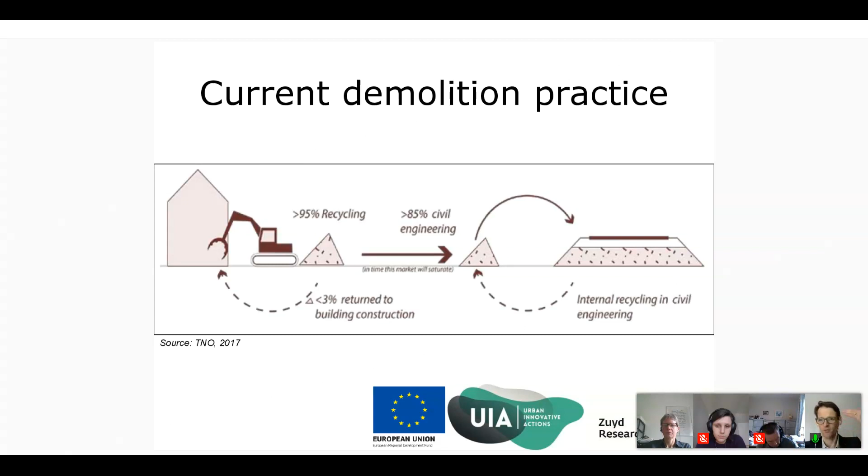A lot of this material is actually concrete, and as you probably all know, concrete's environmental impact related to the whole construction industry is very significant, about 40 to 60%. At this moment, the rate of circularity in the construction industry in the Netherlands is very low, it's 3%, and a lot of the 95% that is recycled is actually downcycling. We're not using the materials at the high level that is possible.

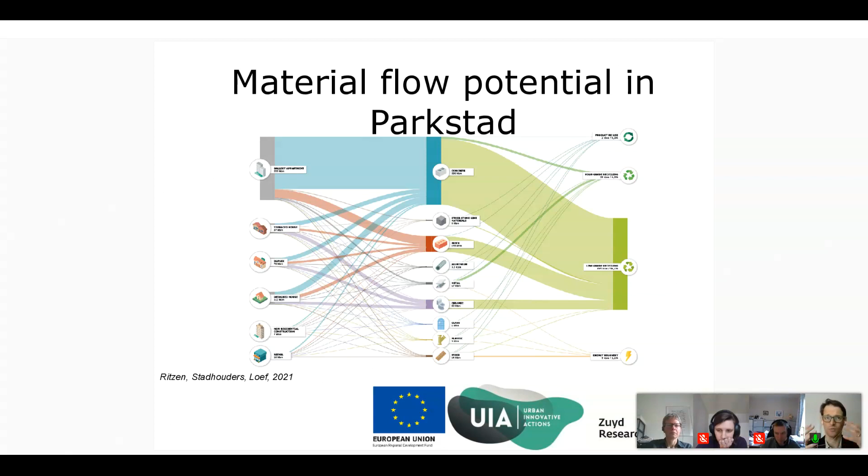Focusing on Parkstad, we've made this inventory of the 10,000 dwellings and 150,000 square meters, to find what the main materials available actually are. And here too we see concrete is one of the main materials.

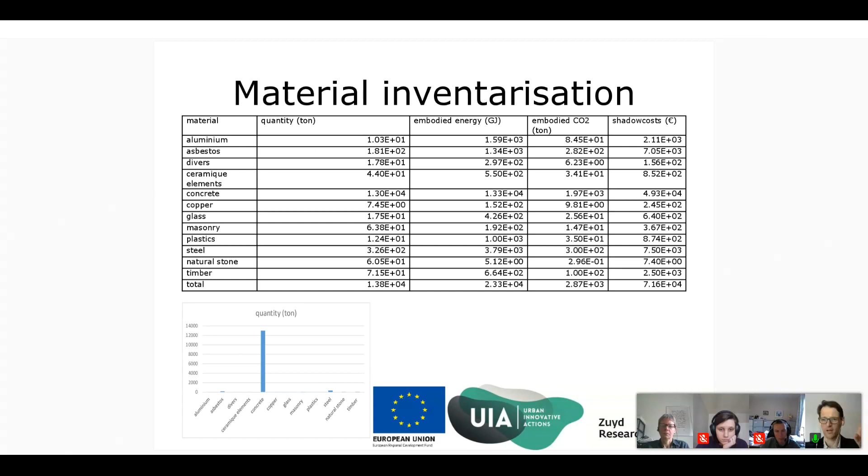In the Superlocal project, which I presented earlier today and was also presented yesterday, we have 4 apartment buildings, and we're looking into how we can deconstruct these buildings and reuse them at the highest level possible. We did a full inventory of all the materials, and in the graph on the bottom left you see that most of the material from this apartment building is concrete.

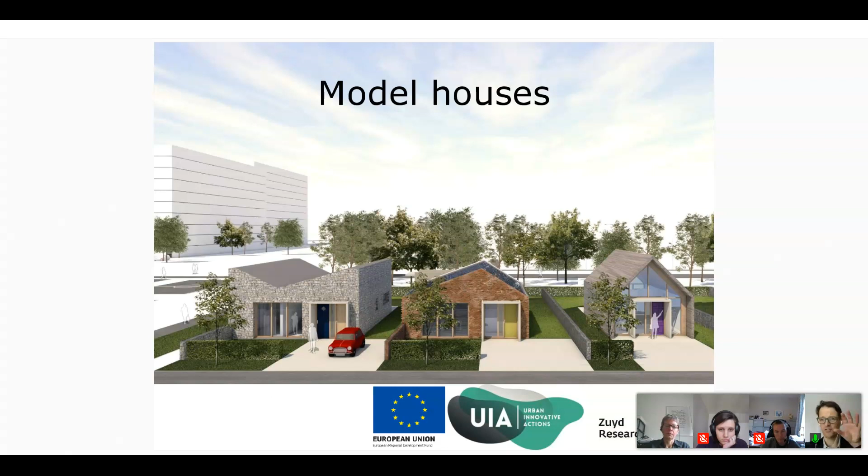So focusing on concrete, we designed 3 model houses. They're now finished, and all kinds of concrete were reused in 5 circular scenarios.

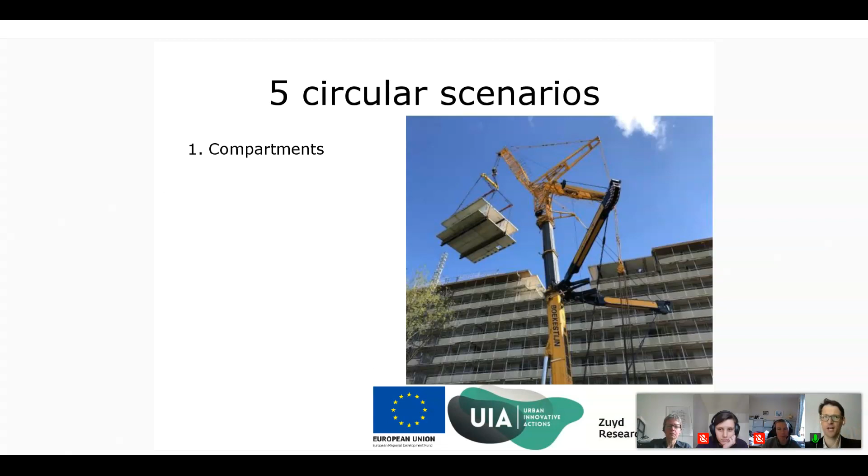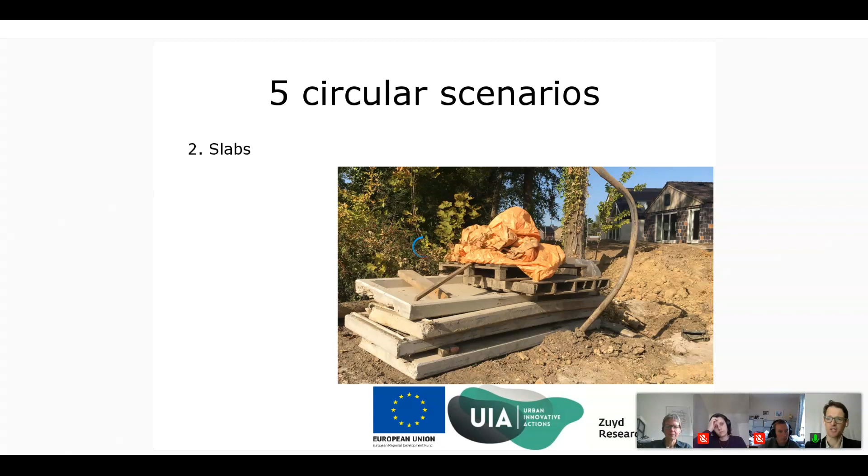The third scenario was that with the concrete rubble, we made recycled concrete and prefabricated elements. The fourth scenario was that we recycled the rubble into granulate and all kinds of fractions, and poured new concrete on-site.

The fifth and last method of circular concrete reuse was that we made small, brick-like elements that you could easily mantle and dismantle again, so they would work a bit like Lego blocks and can be put together.

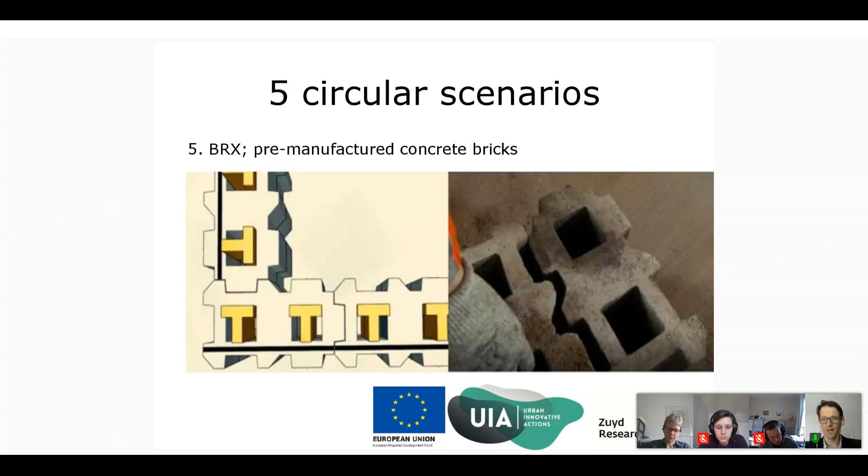We started with an analysis of the circularity of these 3 model houses, and what was quite interesting is that we looked at the numbers and data we already had from research done.

In that research, you could see that for the application phase of a building material, about 3% of the embodied energy is necessary. So mainly the embodied energy is in the production of materials. That was a number we took with us when we did our first analysis.

The second number we took was that in the first rounds of data collection and calculations, we found out that recycling concrete demanded about 20% of the original embodied energy. But going in deeper, we found out that these numbers were much too positive.

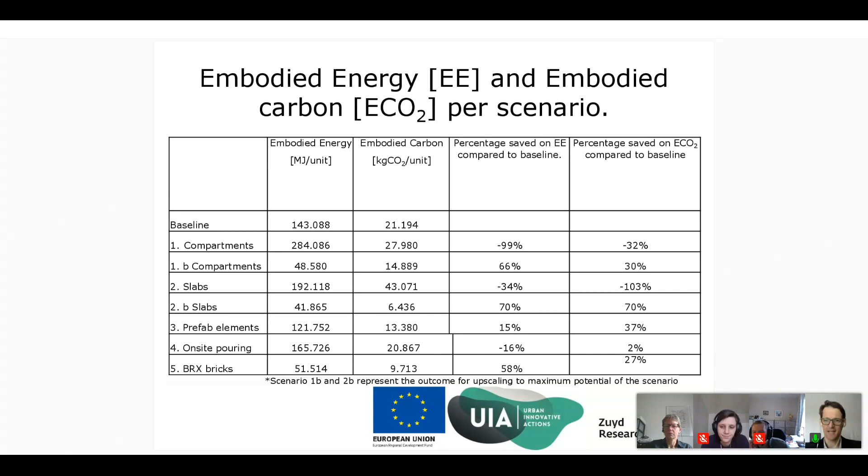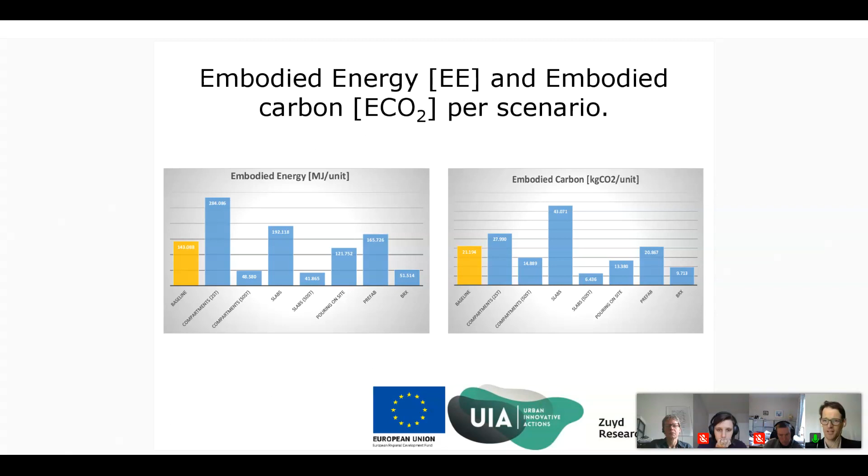Here you can see these numbers again. On the left hand you can see the baseline—that's the standard demolition and new concrete development and pouring. Taking out only these 2 compartments, which we did in the project itself, costs a lot more energy. If you optimize that process to 50 compartments, there you can really see the savings. So compartments, hoisting out compartments, and even more interesting from an environmental perspective is reusing these slabs.

With that, I want to conclude this presentation. We see that there's a lot of energy and CO2 savings possible with maximum potential. If you hoist out 50 apartments—if you go below that number, it will be very difficult to have any environmental impact gains. And recycling of concrete has really only a minimal benefit.

But there's a big but here. We didn't look at extracting the still reactive cement from the rubble concrete, because if you pour concrete, not all the cement has reacted, and if you can extract that, you can realize more savings here. There's some research going on in that field.

If we improve or optimize the machinery use, we can improve some aspects, but the most important thing is that if we look now at such a building, it is not designed at all for disassembly and reuse on a compartment or component level. That is really something we have to rethink—if we design these kinds of buildings, we have to think about what are the end-of-life possibilities.

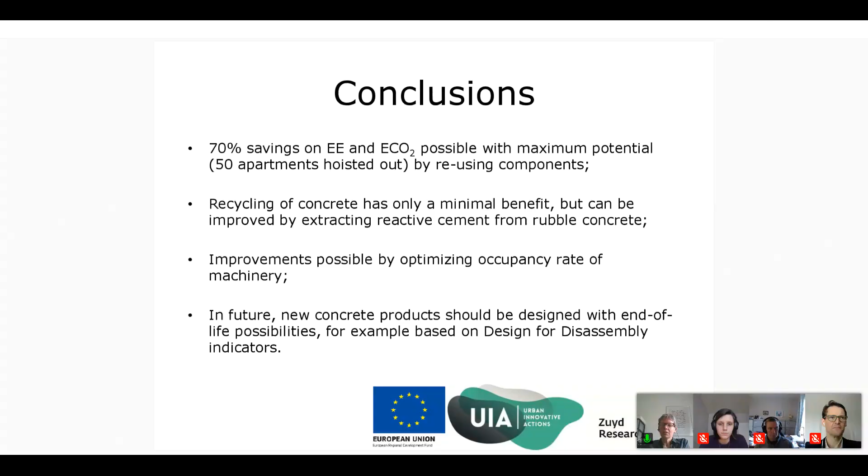Yeah, great. Okay, so now everyone can see my screen, right? So I can start. Okay, thank you very much for having me. This is Jiang. So today I would like to present the research that I have conducted during my master studies. It is about circularity metrics based on the MCI to measure the circularity performance.

We all know that the circularity transition is still in its early stage. There is no recognized way of measuring how effectively it's making the transition from linear to circular, while standard measurement is quite important, to guide users in the right direction for the circularity transition.

My general objective is to develop a tool for monitoring circularity progress. Since it's too challenging to develop a completely new method, my research focuses on the Material Circularity Indicator, or MCI, as a starting point. The MCI is one of the most famous circularity frameworks, so most of you have probably heard of it. Given limited time, I'll introduce the limitations inherent in the MCI directly.

In a circularity metric, units are always used to represent the material's value, while mass flow is used in the MCI, meaning material with larger weight always has higher value. This is of course unreasonable. The main drawback of using mass flow is its inability to distinguish the relative value scarcity of different materials.

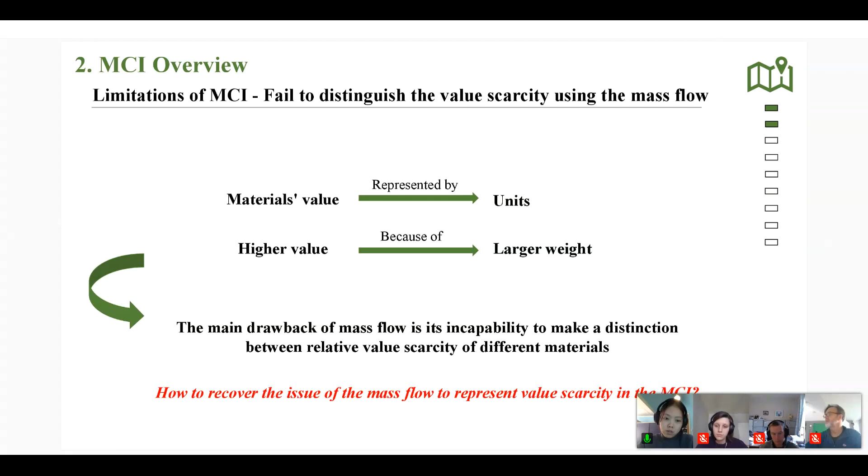So my question would be: how to resolve the issue of mass flow representing value scarcity in the MCI? And furthermore, there is another limitation.

Another limitation is that the MCI assumes the quality and quantity of products after end of life is the same as a new one, meaning the residual value after end of life is equal to its original value before usage.

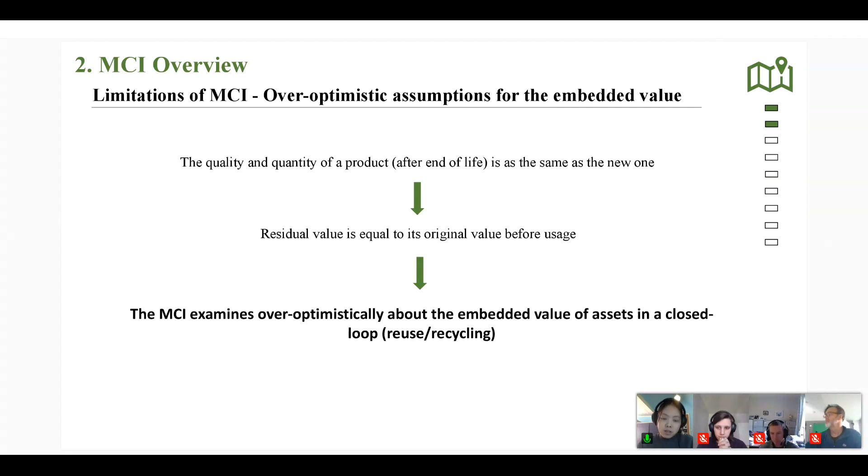This is also one of the most common limitations of existing circularity metrics, because most of them use physical measurement units like volume or mass flow, as in the MCI, which fails to capture value changes over time. In short, the MCI is over-optimistic about the embedded value of an asset in a closed loop.

It is widely agreed that there is a close relationship between circularity level and residual value, but strangely, no existing approach considers residual value as an independent indicator. So I'm thinking it may be meaningful to build an independent residual value indicator into the circularity metric.

Instead of simply building the indicator, it's fundamental to think about how to quantify it. This isn't easy, because no specific method can be found in the literature that directly assesses the residual value of products or materials. So my question becomes: how to measure the residual value of materials to support circularity assessment in the MCI?

With this introduction, my objective becomes more concrete: to develop a circularity metric by resolving the limitations inherent in the MCI at the product level in the construction sector. Two research questions have been developed corresponding to the two limitations I introduced before.

I also developed a research methodology with four phases, starting with phase 1, the literature review, and the models developed in phase 2. Before developing the circularity metric in my thesis, I also developed a simple tool named the residual value calculator.

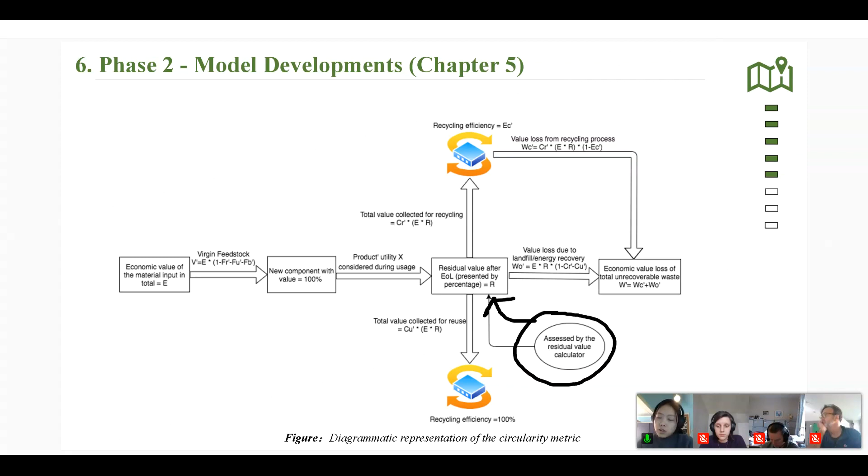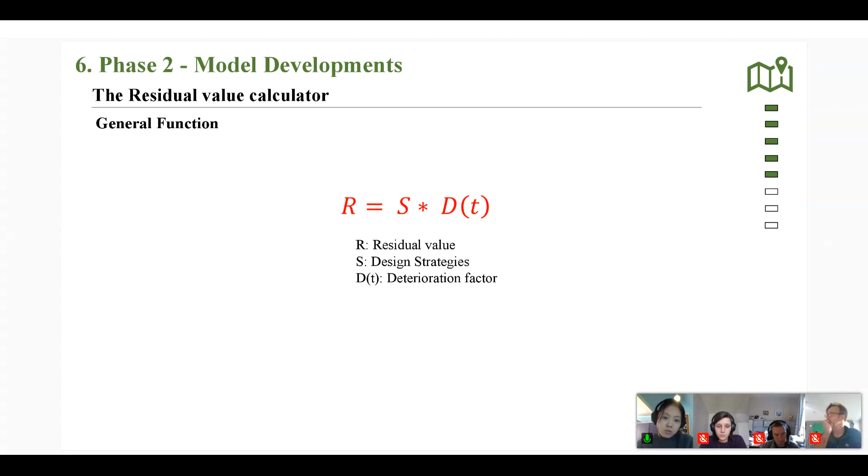Let me introduce how the residual value calculator looks. This calculator is still in its early stage, so currently I only consider two groups of factors: the deterioration factor and the design strategies. It's assumed that if more effort is focused at the early design stage, the residual performance or residual value can be maintained as much as possible.

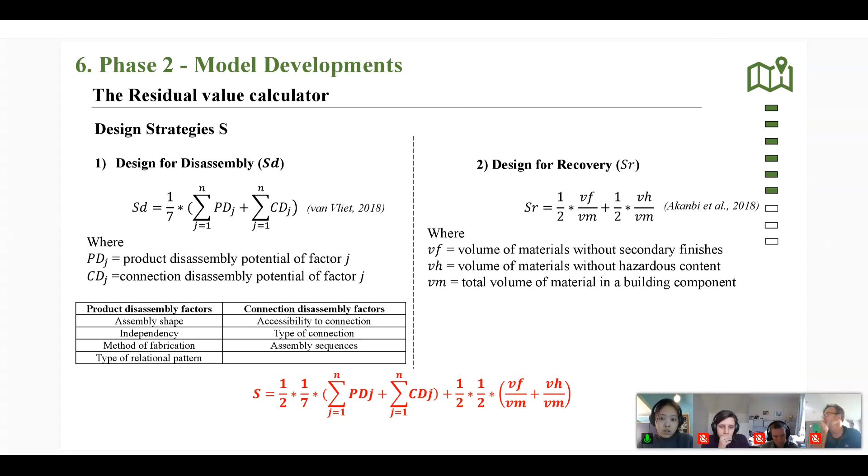Specifically for the design strategies, I focus on the two most important design factors, for example design for disassembly or design for recovery. I also developed some mathematical functions, referring to various scholars, to assess the design strategies in a relatively objective way.

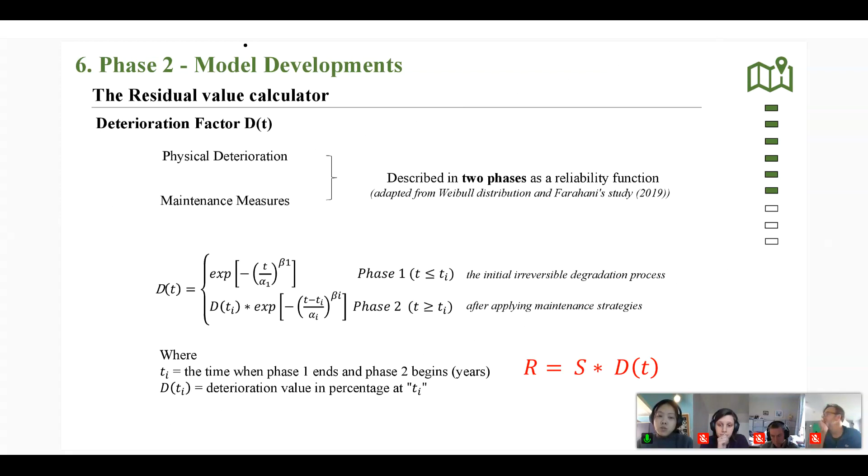For the deterioration factor, I also consider physical deterioration and maintenance measures, these two factors, and then designed a two-phase reliability function to assess the effects of the deterioration factors on the residual performance in an objective way.

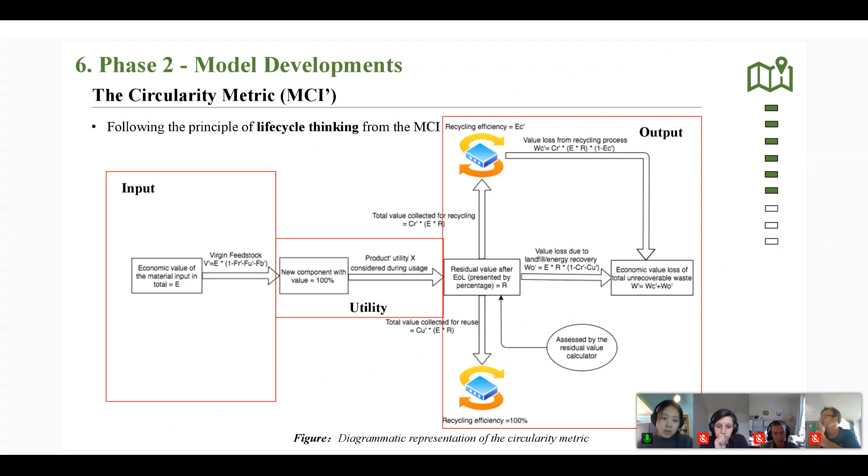Then I would like to introduce the most important part of my thesis: the circularity metric. I maintain the advantages of the MCI, following the principle of life cycle thinking. In my metric, I consider the input, the utility, and also the output. Furthermore, the circularity metric was modified from MCI by resolving these two limitations as I introduced before.

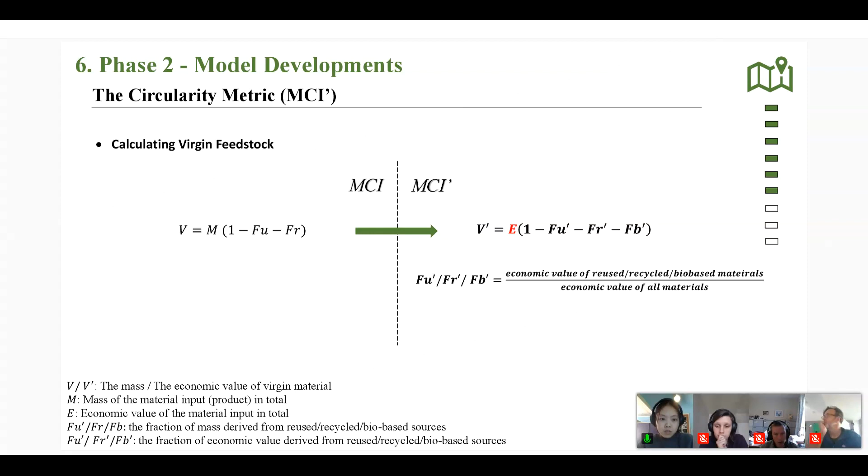For example, when calculating the input parts, I use a new measurement unit, E, which represents the economic value of materials to replace the mass flow used in the MCI. Similarly, when calculating the output, I also use the economic value of unrecoverable waste to replace the mass flow, and also integrated a new independent indicator, R, which is the residual value of materials, so that I can measure the circularity performance from an economic perspective in a more reasonable way.

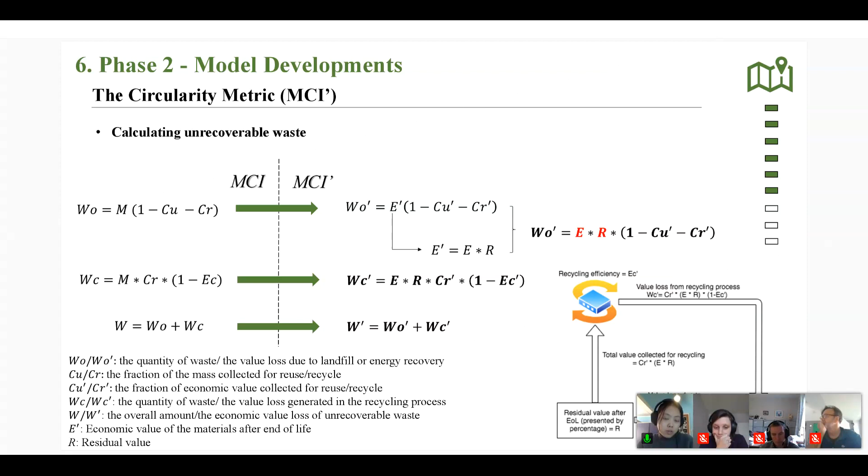Similarly, I also revised an important indicator named the linear flow index, which measures the proportion of materials flowing in a linear fashion, combining the inputs and output, while directly maintaining the utility factor from the MCI. Overall, by resolving these two limitations, I created a new function to assess the circularity performance, called MCI prime.

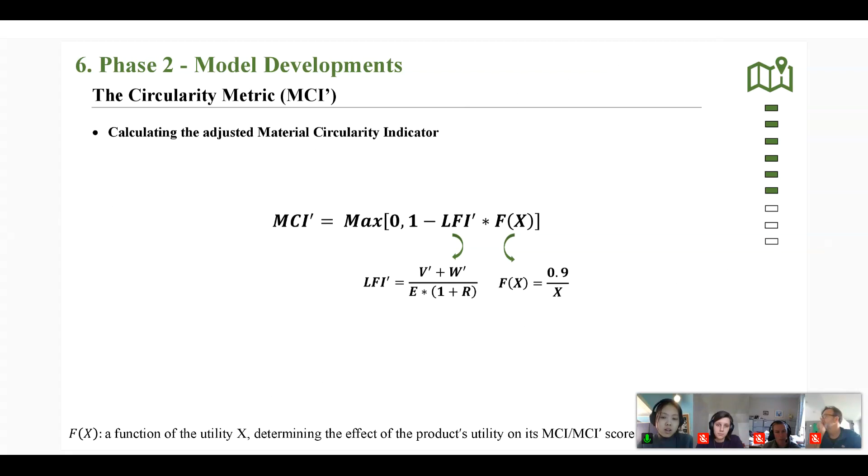I'm sorry that I only briefly introduced the methods, because it would take too much time to go deep into the mathematical functions. I'd invite you to look into the papers or this PowerPoint later if you're interested. So with the complete model, we go into phase 3, the validation.

This phase is mainly about understanding the effects of each adjustment, and their combined effect, on the overall circularity performance. I use a real project provided by a platform in the Netherlands, and instead of focusing on the whole building system, my method is mainly designed on the product level. So here I focus on the facade of the project directly.

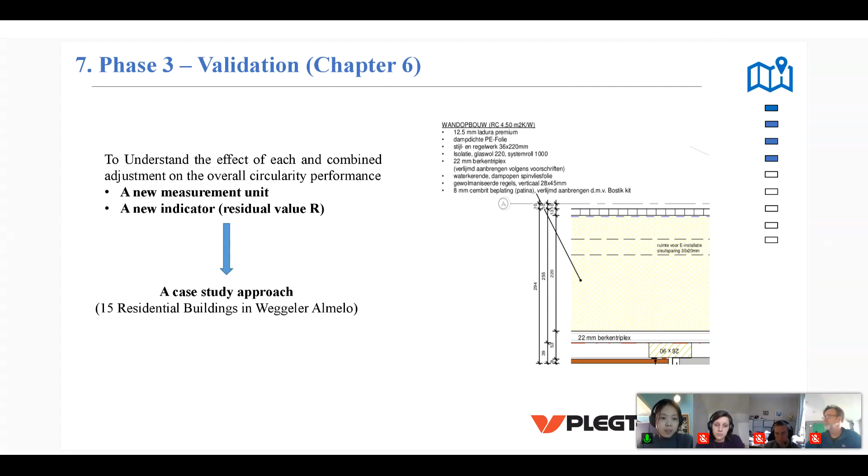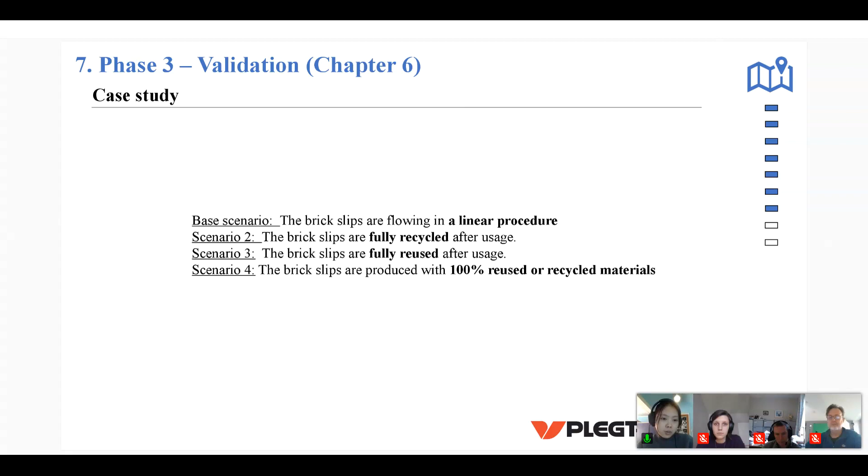I also created different scenarios in order to validate my methods in a complete way. For example, in the base scenario, it's assumed that materials follow a linear procedure, and some circular methods are assumed to be conducted in the other scenarios. So here you can see some of my results.

The validation process follows different steps. Step 1 is mainly focused on the first limitation, or the first adjustment, in order to understand the differences between using mass flow or using economic value.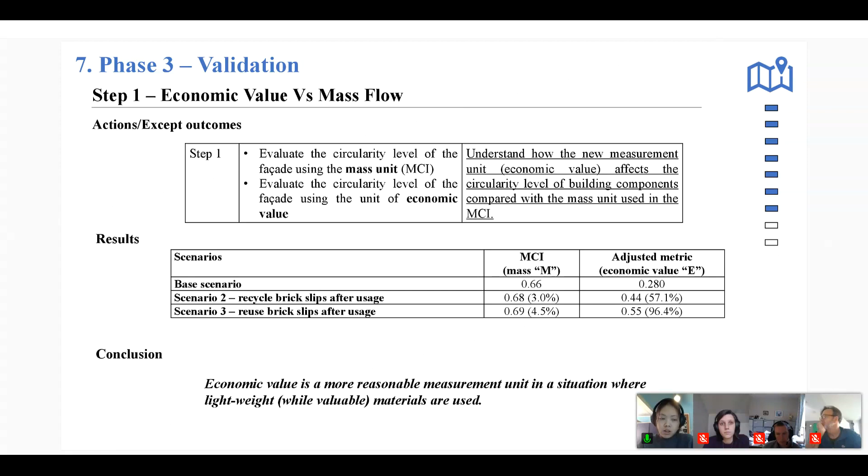Lee, are you going to the conclusions? I guess two minutes is enough for me. Is this okay? Yeah, one minute. Okay, I'm quite sorry for that.

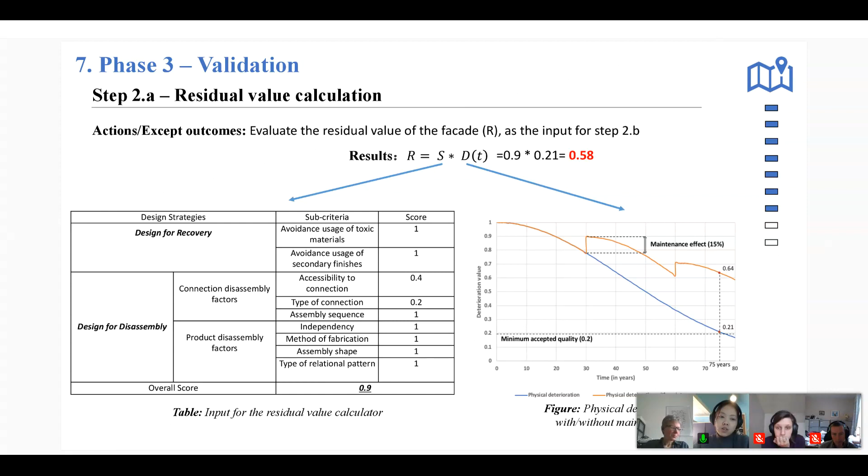So then it's about step 2, to evaluate and assess the residual value, and then I can examine the effect of R. You can see that when I integrated R, the effects show differently across different scenarios.

It's quite easy to understand because, for example, when R is smaller than 1, that means the material's value declines with time. Under this condition, we need to focus more effort on the input rather than the output, because the value involved in the input is much greater than the output. So when I integrated this indicator, it can distinguish between the input and output.

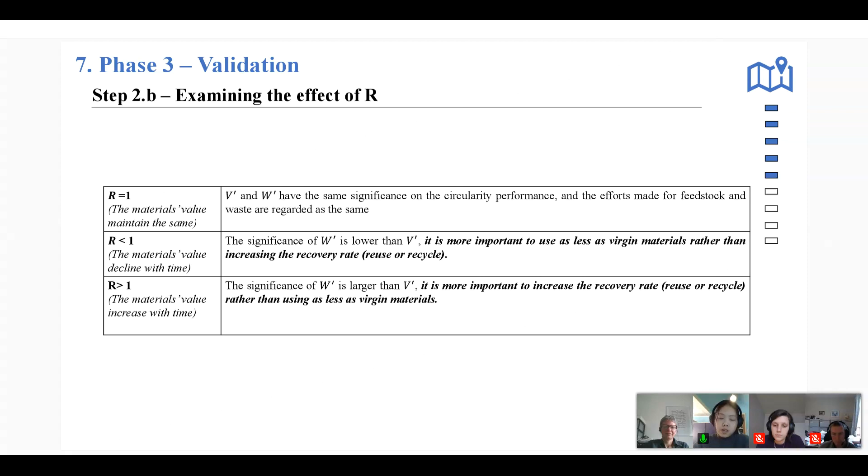So then finally I go to my conclusion. In my thesis, I developed a new method based on the MCI, mainly focusing on two limitations. The first is about the mass flow, and then I also built an independent indicator, the residual value, and built a calculator to assess this indicator as well. Thank you very much for listening.

Thank you very much, Lee. It was very interesting to hear about these developments, because we all want to measure circularity for sure.

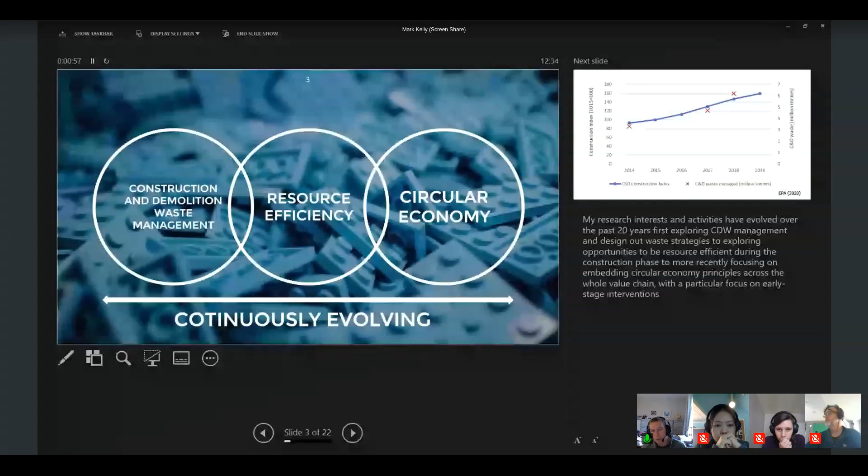So I suppose this is the problem really: the link between construction output and construction demolition waste production. On the graph here, you'll see a gradual increase from 2014 to 2019. But if we put this graph back to 2007, we were actually at a figure of 18 million tonnes, and that figure only dropped to 3 million tonnes in 2014 due to the economic crash. So we can see a direct link with economic activity, construction output, and C&D waste production. So the aim really is trying to decouple that - as production increases, can we reduce or even keep C&D waste production at a plateau?

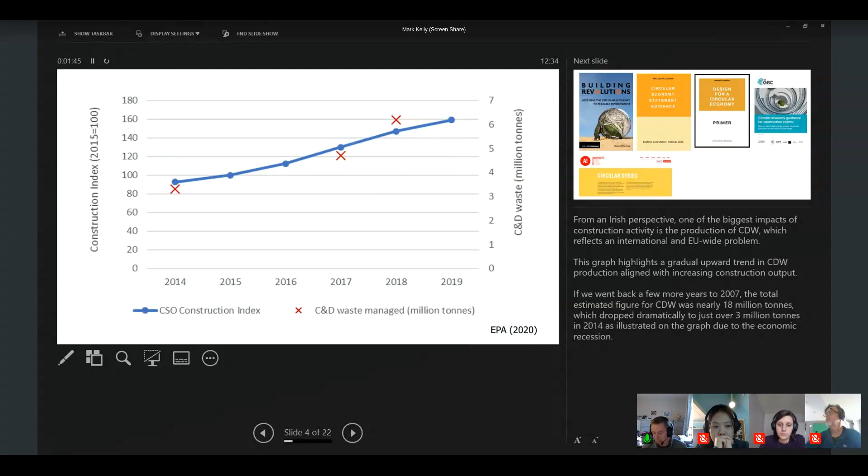Just to contextualize where I'm coming from: over the last 18 to 24 months we've seen a lot of really good guidance coming out from planning authorities, especially London, and also very good guidance for clients, and just general good guidance around circular economy more holistically, which is beginning to inform the supply chain in Ireland. Over the last 12 months in Ireland, we've built on that and released a series of checklists or beginner fact sheets, developed in conjunction with the Southern Waste Region in Ireland, which are introductions for the different stakeholders. There's also been a series of webinars commencing in the last couple of months focusing on the circular economy, all supported by various policy documents and the work of the Irish Green Building Council, which means this is now becoming a forefront of thinking in the construction sector.

David Cheshire, as you're probably all familiar with it, has a nice graphic outlining the different principles, moving from different layers of decision making, which is what I want to talk to you about today, incorporating different design principles and the hierarchy of retention, refurbishment, and reuse, designing out waste, designing for adaptability, and so on. So really good principles from a design and planning point of view.

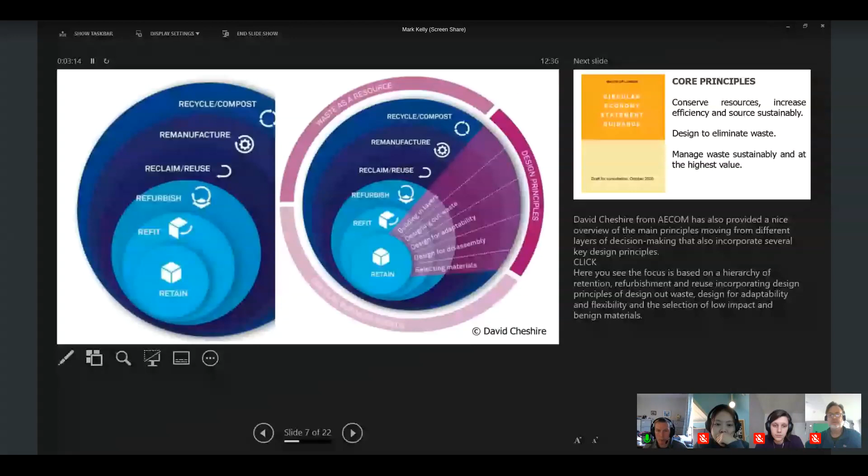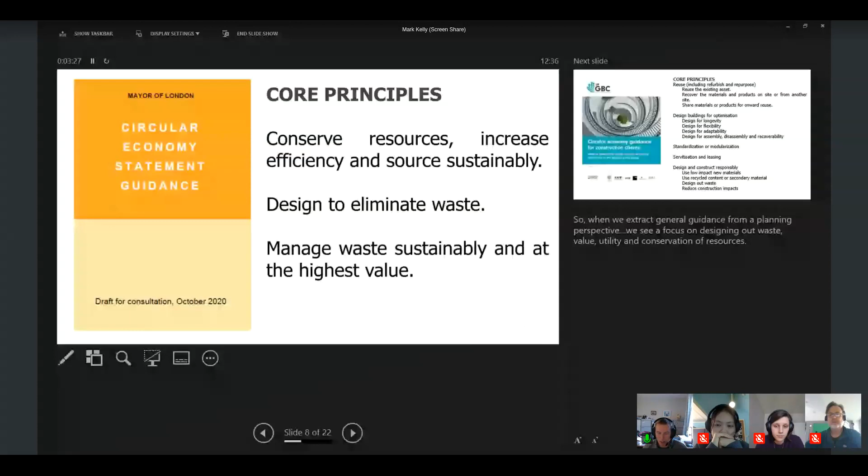So when we look at the planning and extract guidance more generally, they're looking at designing out waste, maintaining value and utility, and the conservation of resources. That's repeated, I suppose, in client guidance with an expanded focus on the operation of an asset and maybe the deconstruction of an asset in the longer term.

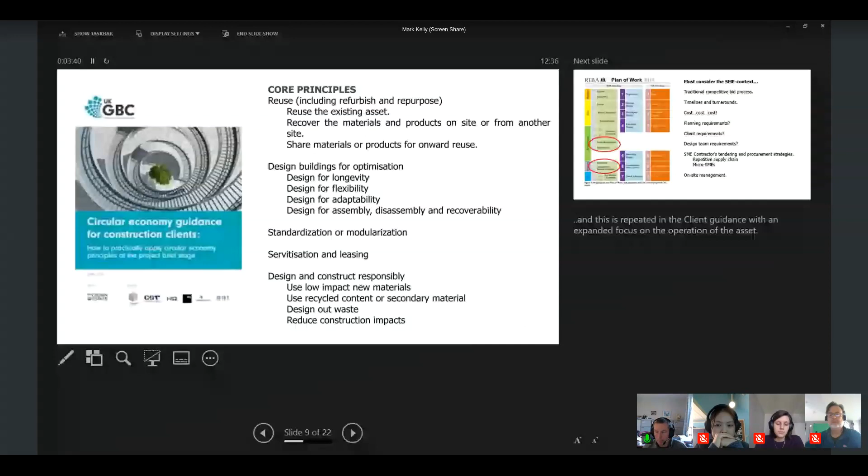But what I wanted to talk to you about today is to consider this from an SME context, and more particularly an SME main contractor context. And there's a whole range of challenges there.

One challenge is the interpretation of what the circular economy actually is. SME contractors on site understand waste because they can see it, but they don't necessarily understand what the circular economy means. So that's an issue.

The traditional competitive bid process, which is very fragmented, is a challenge. The very short timelines between tender award and commencement on site. The high importance of cost, which is all persuasive at times, and the lack of planning, client and design sustainability requirements for projects of this scale.

And if they are included, they mostly focus on low energy design. However, there are some opportunities that present themselves when you dig into the business model of an SME. One of those is the tendering and procurement strategy of their own supply chain, because it tends to be quite repetitive, and it's dealing with micro SMEs of 5 to 10 people or less.

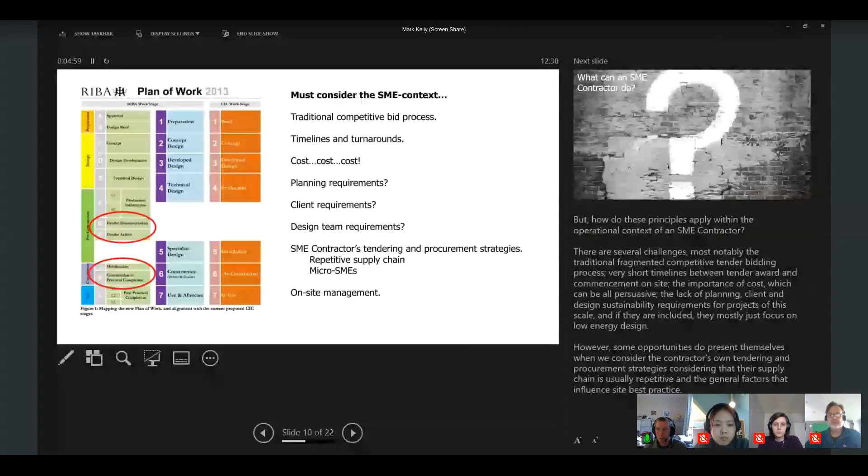And also what they can do from an on-site management point of view. So the question, I suppose, is what role can an SME contractor play in a circular built environment? And so how we approach this on a current project is to build on previous work.

This worked really well, and we developed a series of case studies, one with a large scale contractor, BAM, and one with a small scale contractor, Carey Building Contractors. We also developed a series of fact sheets, which were disseminated and shared across industry to demonstrate that resource efficiency can be achieved without having a high input cost.

So what we decided, or what we discovered from that, was to continue this work with the SME partner, Carey Building Contractors, to look at how they can transition from resource efficiency good practice to more circular practice.

And we found that the main driver has been the development of a resource management plan for each project, irrespective of whether it was asked for or not by the planning authorities, client or design team, as this provides a structured approach to engaging with the supply chain in the pre-construction planning and construction phases.

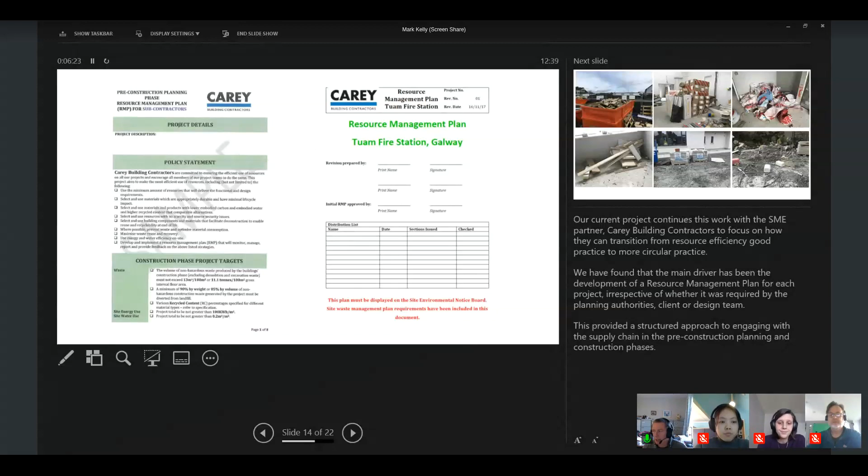And so what we've seen is some good practice following this intervention, which includes source segregation on site, the employment of take-back schemes with suppliers, direct reuse of offcuts on site, and also proper material storage.

But some challenges were also identified in relation to non-returnable packaging, for example cement bags, poor material storage on site, and indirect waste that doesn't actually end up in the skip, which you can see down there in the bottom right corner, but occurs all over the site.

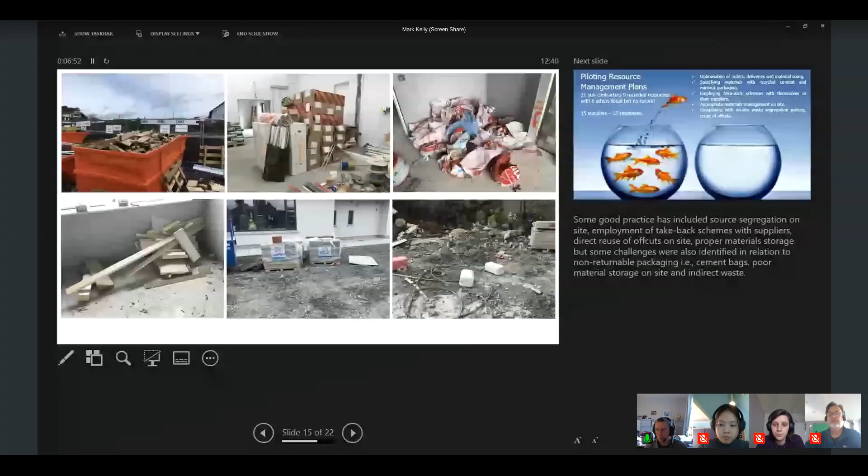So we decided to expand the role of the resource management plans by requiring the supply chain, so these micro SMEs, to complete their own resource management plan checklist to demonstrate a willingness to comply with the project targets.

And so as you can see in one of the case study projects, we had a mixed result from subcontractors, but a very positive result from suppliers. In general, both stakeholder groups agreed to optimize orders, minimize packaging where possible, participate in take-back schemes, and comply with site rules in relation to segregation and materials management.

So we're currently analysing this case study data to determine the impact of this in comparison with similar projects which had no resource management plan supply chain requirement whatsoever.

Although in general this has demonstrated a gradual willingness to engage in more resource efficient and circular practice on site, it is in effect a reactive process. So what we want to do is go back to the whole understanding of circularity and frame it in an easy to understand way. So what we decided was to reconceptualize the idea of waste, because waste is what contractors understand, and look at it as a resource and a language that site personnel will easily understand.

So we return to the main driver, which is cost, and more specifically, the true cost of waste. In the graphic there, you see a selection of skips from one of the case study sites, and we've identified the costs in green and the costs in red. The costs in red are the costs that would appear under monthly waste reports, but the costs in green are maybe costs that they haven't included.

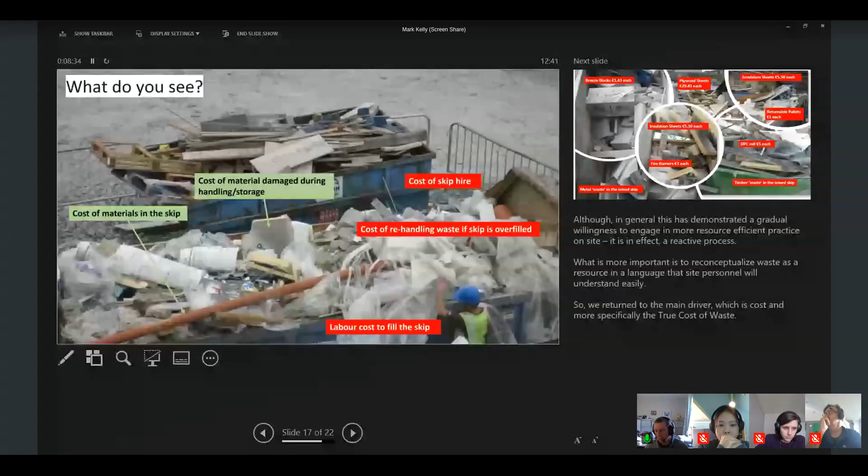And so we went a little bit further then, as we started breaking down the skip size by looking at the original purchase costs of materials that are now wasted in skips, to hopefully begin to stimulate a more preventative and circular mindset. And this is informing training interventions, education interventions that we're using on sites, so site posters, toolbox talks, and so on.

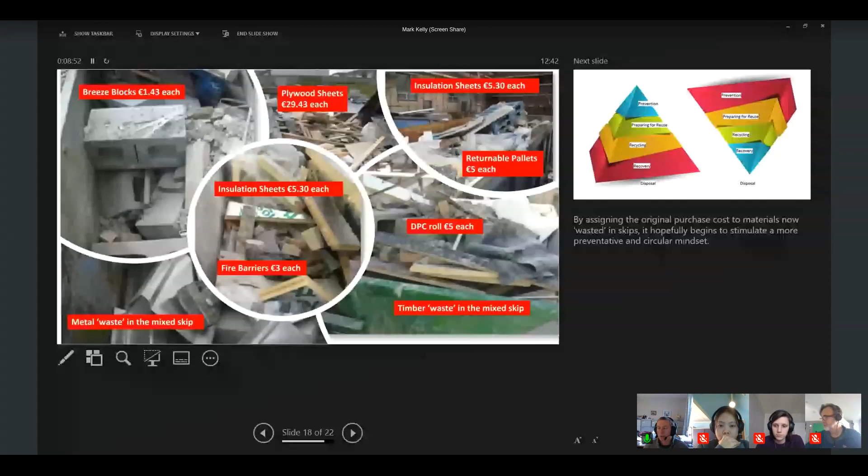For a long time, main contractors, especially SME contractors, have thought of recycling as best practice. So we're now looking to move the sector away from this towards more preventative approaches, where designing out waste and reuse are the default approaches. This will obviously require earlier interventions from the planning authority, client and design team. So it's a sort of retrospective analysis, as we're looking from the site and working backwards in this case.

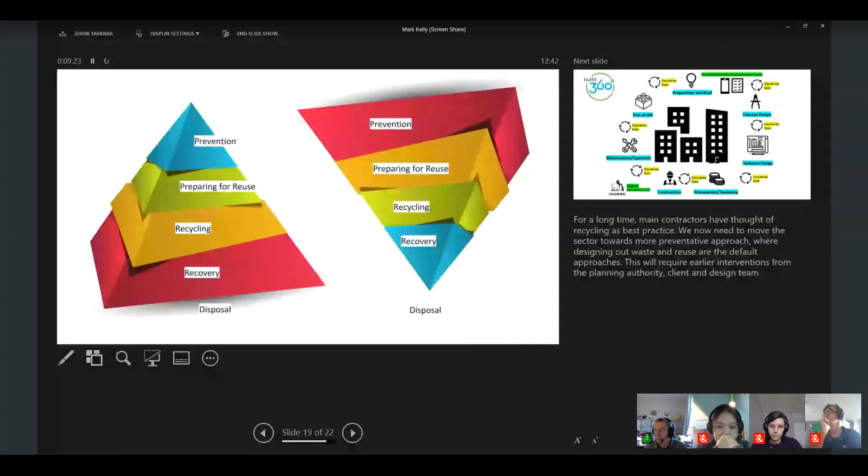So what we've done is we've updated our case study methodology to identify opportunities where we can embed circular economy principles at an earlier stage and track the impact at each stage. And we're working with a number of clients at the moment doing just this, working from pre-demolition audits, pre-refurbishment surveys, and working our way through the design elements, the procurement elements, and so on.

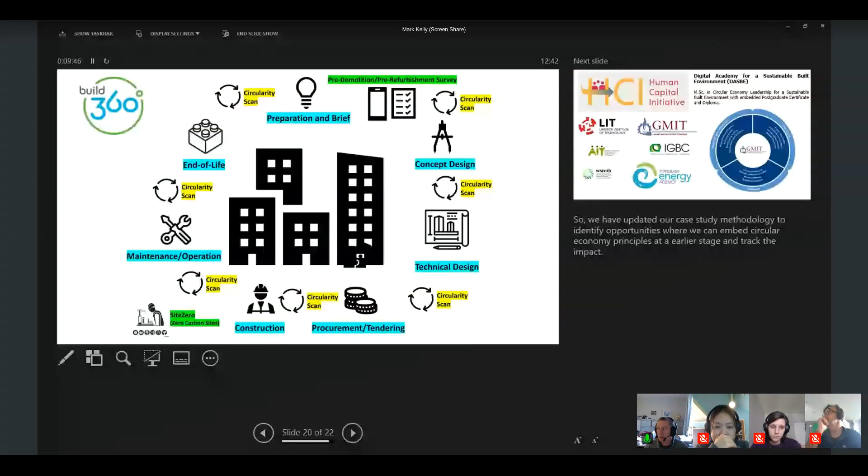Finally, I just want to share some good news in relation to how this ongoing research is informing curriculum and program development in GMIT. We received funding in September 2020 from the Irish government to the tune of over €7 million to establish a digital academy for a sustainable built environment with our partners listed here. And one of the main outputs will be the development of an MSc in circular economy leadership for a sustainable built environment, which is currently under development.

And we use a reciprocal learning framework, which you'll see on your right there, which basically combines industry best practice, applied research, and collaborating with industry to inform our curriculum development. So we see research-informed and evidence-based curriculum development as key to everything we do.

It was very interesting to see the progress in Ireland on this topic. I'm asking now again, Paula. If you hear me now, otherwise we... Much better, much better. Yeah, because I changed. I have a Mac, and sometimes they don't correspond with the Chrome. Exactly, that's what some people already suggested.

Very good. So, Paula, then I propose that you share your screen. Yeah. Yeah, you see it now? Yeah, we can see it. Please make sure you use the presentation mode. I think I do that, but I'm not sure if you see... yeah, that, this is perfect. Okay, go ahead. Collaborative approaches. Yeah, thank you.

So I'm going to shortly present a collaborative project, the project where we collaborate between countries and between academy and industry in the search of more circular kitchens, as one important component of buildings, which is often replaced prematurely. And we are in this project not only researching circular solutions, but also producing circular solutions. So it's a 4-year project.

In the Netherlands, we have partners at TU Delft, Professor Vincent Gruis, and the Swedish team is led by Professor Ulrike Rahe. We have 2 teams, and both teams work with the national context, so the Dutch work with the Dutch situation and the Swedish with Swedish partners and the Swedish situation. And the ambition, or the goal, is to reach market-ready circular products in both countries, which will be different projects. In this paper, I will give some critical perspectives on the ongoing project, its approach, and its outcome.

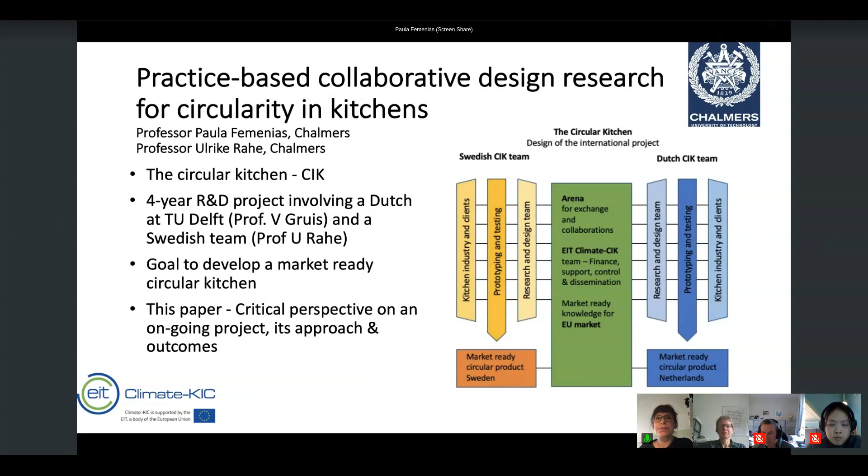Background and motivation: Swedish Insights studies on home renovation was a study I made some years ago where we could identify that most of the climate impact material flows from internal occupant-driven renovations came from changes in kitchens, as you can see in the picture I attached.

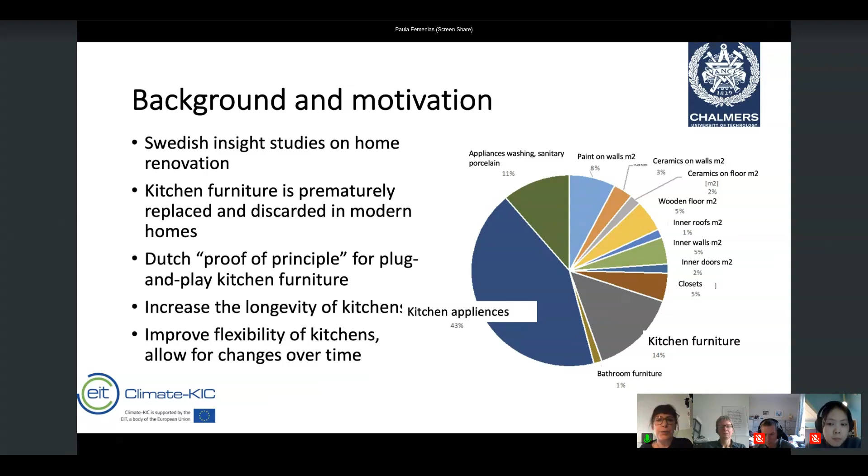Most of it is related to kitchen appliances, but also as much as 14% were related to kitchen furniture replacement. The Dutch team had already proof of principle for plug-and-play kitchen furniture, which could be designed as a circular solution. So together we applied for this research funding and got the money. Our ambition is to increase the longevity of the kitchen and improve its flexibility, allowing for changes over time, which we know will happen.

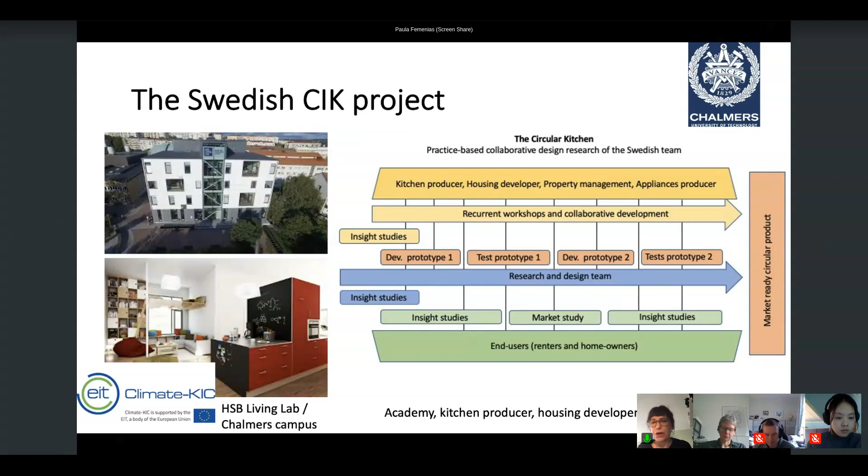So in the Swedish CIK project, as I said, we are an academic partner. Together in the team we also have a kitchen producer, a national kitchen producer, a housing developer - one of the larger housing developers in the country, producing mainly occupant-owned apartments - and an international appliance producer. In Sweden, we have the possibility of testing new solutions in a purpose-built facility, a living lab, which we have on the campus of our university, which is also a partner in this project.

I'm going through the different parts of the project, the different approaches that we have taken. We have worked a lot with collaboration and co-design processes within the national team with our partners, and in international collaboration with the Dutch partners, the Dutch industry partners, and the academic partners. In Sweden we have also worked with insight studies of end users, supply chain studies to understand current business models. We also worked with spatial studies relating not just the kitchen to the furniture, but how the furniture interacts with the rest of the home and apartment. We have also done some market studies, and we have worked with prototyping.

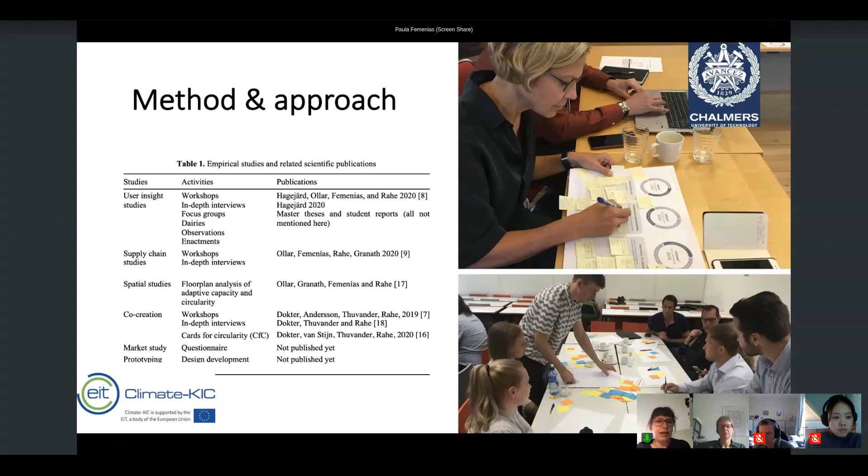I will go more into detail on these different parts. First, we did user insight studies, working with diaries, focus groups, deep interviews, home visits. We have also done workshops in our living lab and cooking events, and we used students - we introduced user insight studies in student assignments among architect students. The ambition of these studies has been to understand current use and changes of a kitchen, as well as future needs of new kitchens, as one part of the input for the new kitchen we're developing.

Supply chain and market study: we had the intention of understanding current and possible future business models, and the influence of the physical infrastructure already in place - how that can be used or has to change in order to produce more circular products. Also the influence of value appreciation in different parts of the value chain. We identified gaps in the value chain, for example a lack of the end user perspective. And we made a questionnaire, a market study, with almost 1,700 respondents in 9 countries.

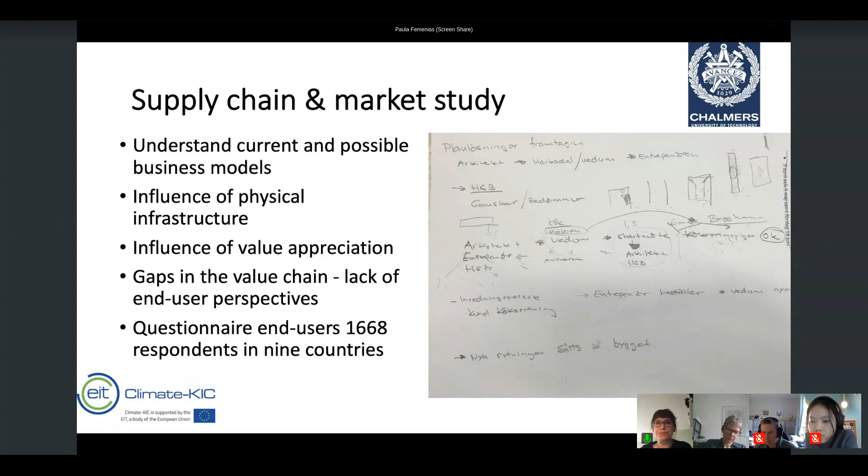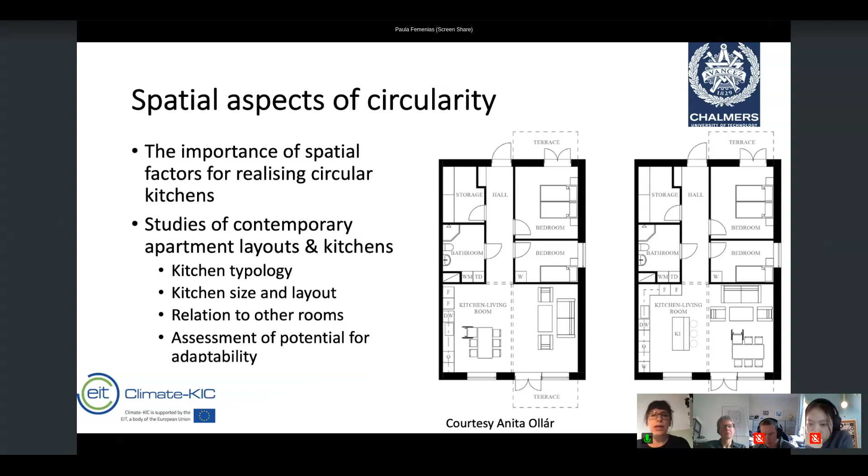The spatial aspect of circularity is something that has not been studied that much. It has been part of some research I've done before, and we had one of our doctoral students in this project work on relating spatial character to producing more circular kitchens. She studied contemporary apartment layouts and kitchens, identified kitchen typology, size and layout, and relation to other rooms, and assessed the potential for adaptability as one important part of circularity.

Design for circularity: we had another doctoral student working on co-creation, understanding how this can work and producing support for that. For example, he produced something called Cards for Circularity, a kind of tool to enhance collaborative processes for new design. These have been tested both on professional actors and design and architect students.

Prototyping and testing: we did a first prototype, which was actually more of a state-of-the-art kitchen today, with movable parts, so that we could try out different layouts and setups. We had different cooking events and workshops with actors - architects, designers, professional chefs - to see which kitchen they preferred, testing it live. We also had some student assignments in the kitchen.

In a later part of the project, we made a new prototype based on our research and experiences, involving external designers, and we also did extensive material research for the new prototype. Where we are now is that we are planning to test this new prototype in 3 kitchens during this year, and then larger tests in homes in the coming years.

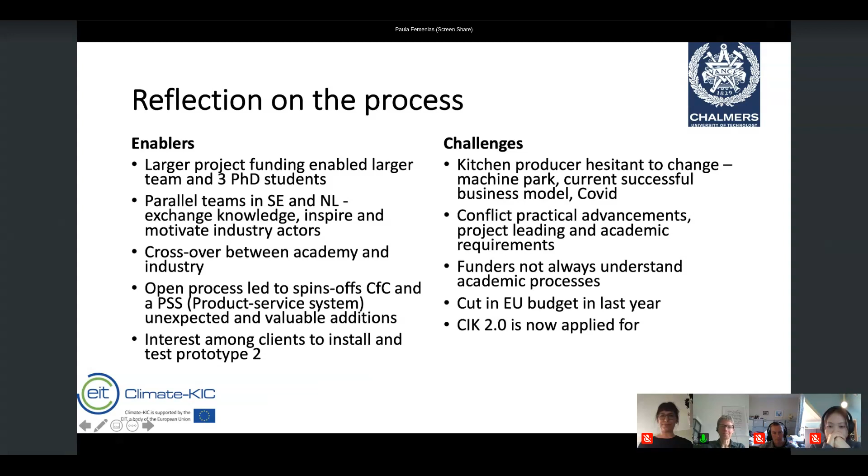Yeah, okay. So hi, I'm Lisa van Gulck. I'm a PhD student at Ghent University, the research group Building Physics. I will talk a little bit more about a circularity assessment method for facade systems that was developed during one of the research projects.

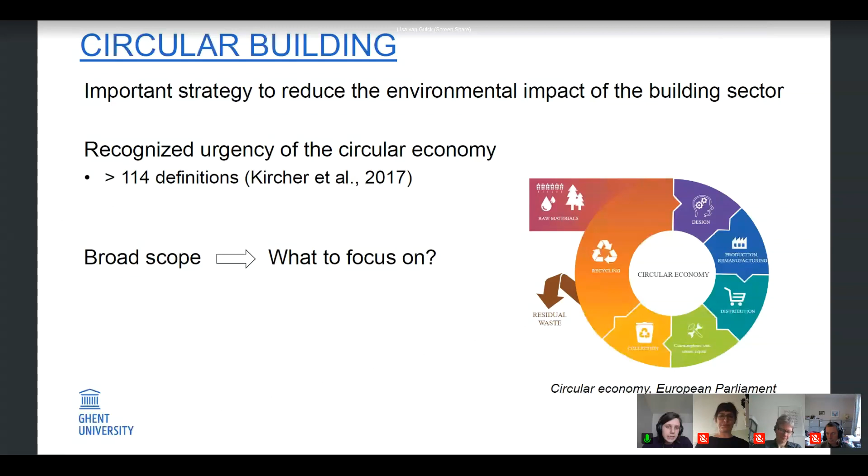This broad scope makes it very hard to define what a circular product is and which aspects we need to focus on. So when we translate this to the building sector, this results in the question: what criteria must a building meet in order to be considered a circular building? Different methods to measure the performance of a building on circularity do exist, and these are what we call circularity assessment methods. They score different building solutions on circular parameters.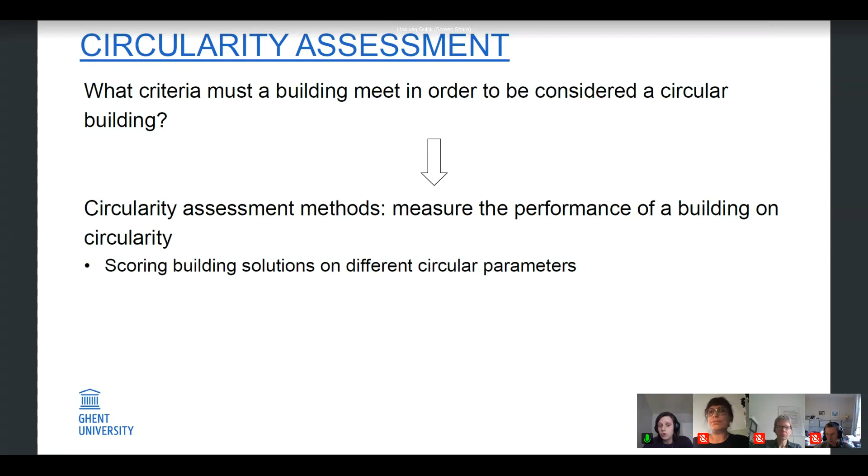The EURECA project, or effectively upscaling the renovation of envelopes with a circular approach, is a 2-year research project funded by the Flemish government under the Circular Flanders initiative. The goal of the project is to develop a circular facade system that is scalable and allows existing high-rise buildings to be renovated quickly and in a circular manner.

The different facade systems thought out during this research should be compared in an objective way on their different aspects, but most importantly on their circularity, because one system may use materials with a low environmental impact but that are connected irreversibly, while another system may use materials with a higher impact but that are connected reversibly, so they can be reused.

To make this objective comparison, a circularity assessment method will be used. Partners in this project are the building consultancy agency Bureau Bouwtechniek, contractor Van Roey, and aluminium constructor De Witte.

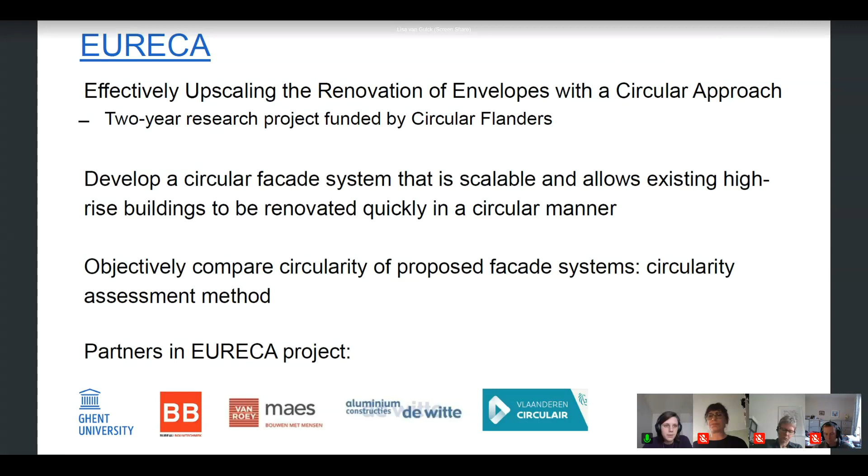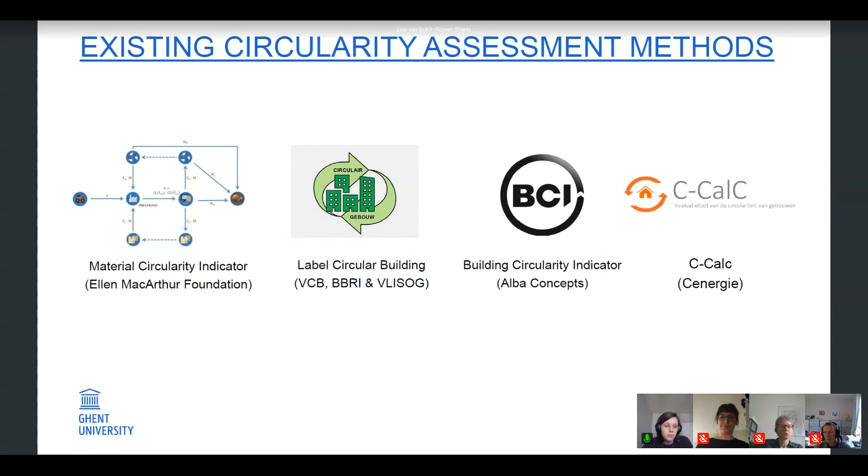Different circularity assessment methods already exist, but when analyzing these, none seemed completely appropriate to evaluate the facade systems of the EURECA project. Existing assessment methods often evaluate circularity on building level, while for the facade systems we want an evaluation on element level. Existing methods often require a lot of detailed information, such as the geographical origin of materials, and also ask for project-specific information, such as the use of BIM models or material passports. While we want to use this method for early-stage decisions, when nothing else than the construction method and general material choices for the facade system have been made.

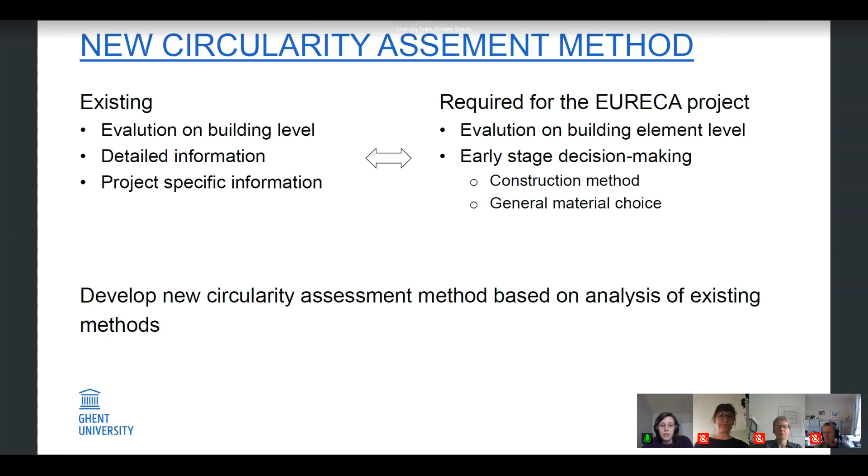So, based on the analysis of existing methods, a new circularity assessment method is developed that allows us to evaluate circularity on element level during an early design stage.

The new method consists of 6 different parameters. The first one is recycling, which takes into account the recycled content and the recycling potential of the materials. The environmental cost relates to the environmental impact of the materials. The expected service life relates to the circular principles that we want durable materials with a long lifespan, and that the construction should be layered according to lifespan.

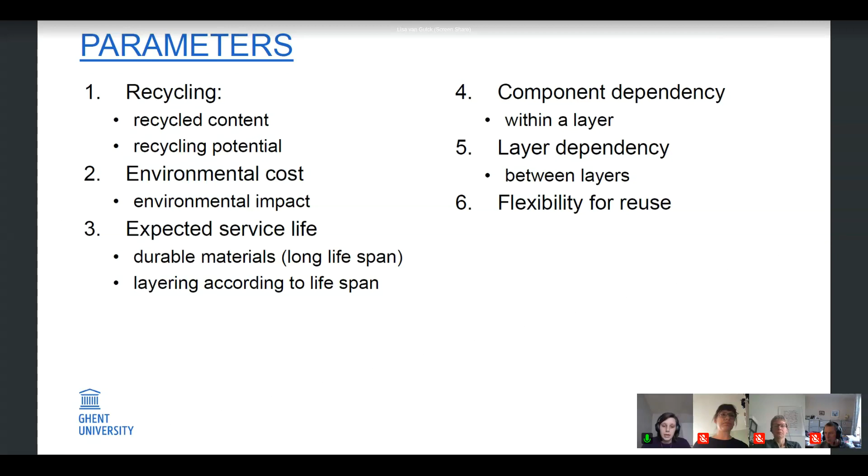The fourth parameter, component dependency, relates to the dependency of components within one layer. Can we adjust one component without altering the other ones? The fifth parameter, layer dependency, is about dependency between layers. The last parameter, flexibility for reuse, is to which extent the materials can be adapted for reuse on a different building.

For the parameter environmental cost, the score is defined for the whole system at once; all material layers and connectors are included. But for the other parameters, first the score is given per material layer, and subsequently these scores are added to get a total parameter score. In general, for the new method, the rule is: the higher the score, the less circular a solution.

To comply with the circular principles, independent layers, and reversible connections, building solutions often require an additional material layer. This is illustrated when we compare an ETICS system with a ventilated facade system. An ETICS system is actually a relatively simple facade system: you have your bearing structure, the insulation, and then a plaster layer that is connected to the insulation.

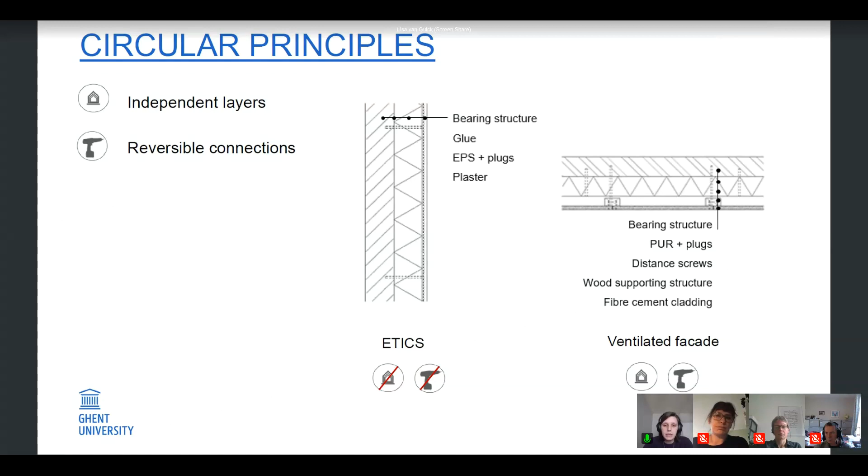Very simple, but it does not comply with either of the circular principles. Then the ventilated facade has an additional wood supporting structure that disconnects the insulation from the facade cladding, and therefore it does comply with both circular principles, but it has an additional material layer that needs to be taken into account when giving a score on the parameters.

Therefore, a distinction is made between parameters which focus on the material aspect, such as recycling, expected service life, and flexibility for reuse, and parameters that focus on the layering aspect, component dependency and layer dependency.

For parameters with the focus on the material aspect, the total parameter score is obtained by weighing the score of the material layer with the relative contribution of that material layer to the environmental cost. We want materials with a high environmental impact to have a high recycling potential, a long service life, and the ability to be reused, so it's logical that they have a higher contribution to the total score.

For the parameters which focus on the layer aspect, the scores of the material layers are just added to one parameter score without weighing.

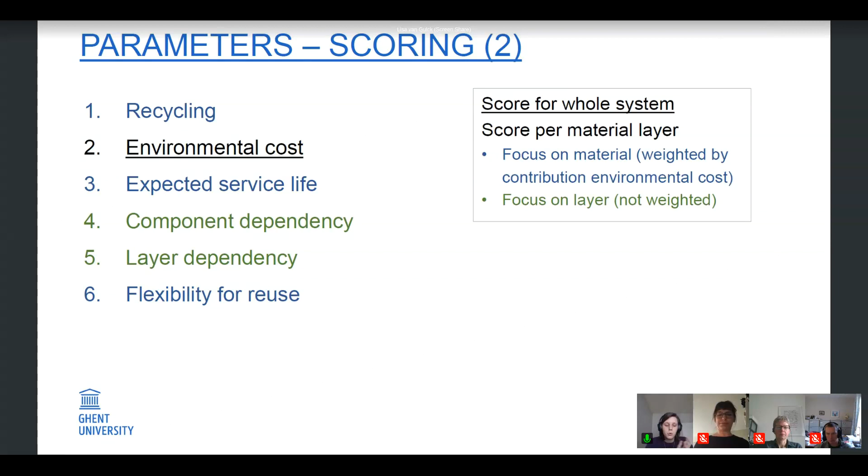Then for each parameter, a relative score is defined: the score of that parameter compared to the average. By using a relative score, all the parameters are set into the same unit, and we can add them all up to a single score.

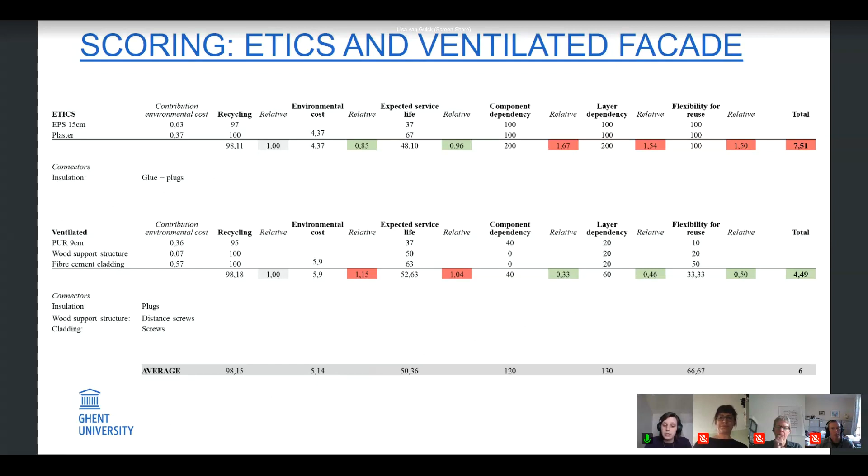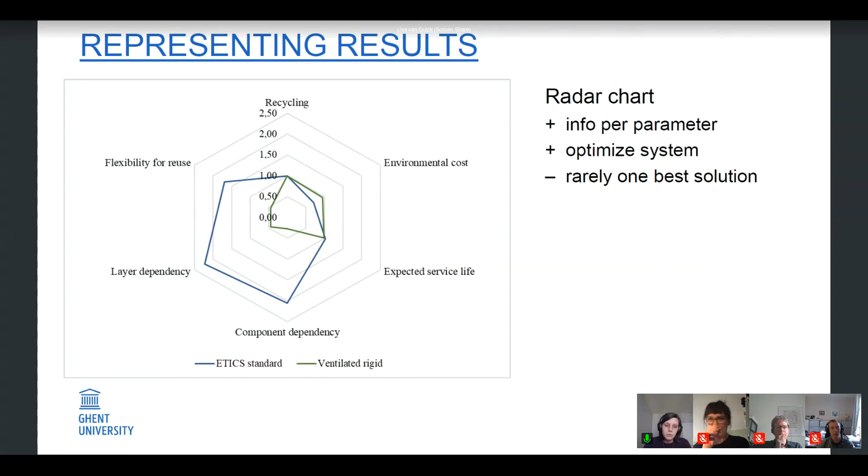The single score is obviously the easiest to base your decisions on because there's only one aspect to take into account, but it can be argued that some information is then pushed to the background, and that representing the score per parameter is better, such as with the radar chart. It also gives you the opportunity to optimize the system without worsening the score on other parameters, but it does make decision-making less straightforward.

So the developed method allows us to measure circularity on element level with only a limited amount of information necessary, and without the need to have a specific project in mind. And this allows us to make decisions in an early stage.

This method will then be used to compare the circularity of the systems thought out in the EURECA project in an objective way.

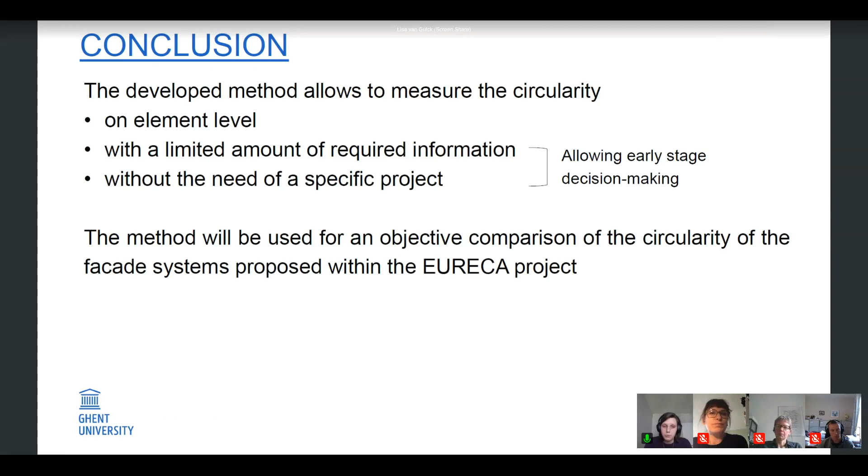The method was thought out for a facade, but it can also be used for other building elements, and it was also applied to renovation scenarios. But in hindsight, the parameters are independent from a renovation or a new build scenario, so it can also be used for new build.

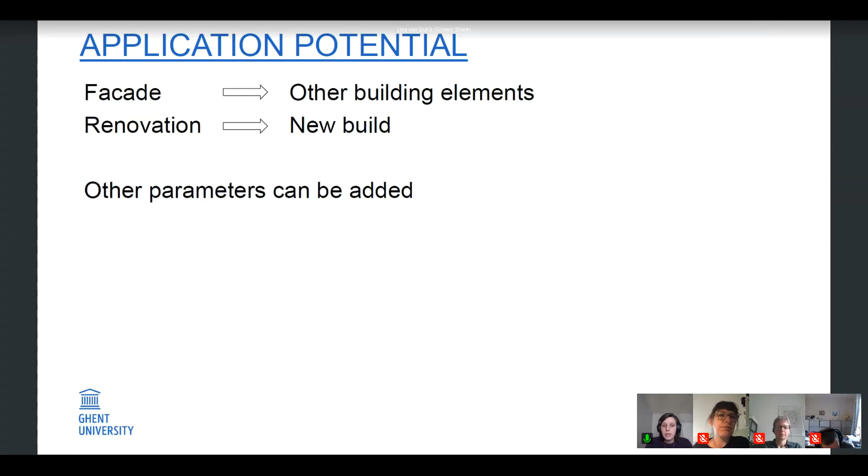For other projects, other parameters can also be added to the method if they seem relevant. Thank you for your attention, and if there were any questions, I will be happy to answer them.

Thank you, Lisa, and at least you get good comments in the chat, so well done. Thank you. So we still have 15 minutes for a Q&A. And I'm very happy that you've all started the Q&A in the chat box. So I'm wondering where to start.

But maybe we can have a reflection on the various assessment methods. I heard about a material circularity indicator in the second presentation, the assessment of Lisa, and the last presentation. Maybe first a question for Paula.

Did you also use this type of assessment method to assess the circularity of the kitchen? It was one of the questions also in the chat. Yeah, they did in the Netherlands, but in Sweden we haven't come that far yet. We don't have that kind of competence in the group, but we've relied a lot on material assessments done by the Dutch team.